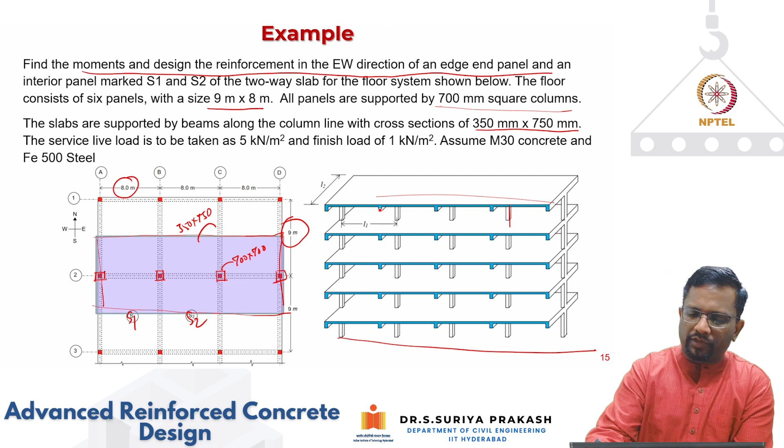Now for these two edge panels, S1 and S2, we have to find out the distribution of moments and calculate what reinforcement is required. So if you look at it in cut elevation - section elevation - this is how it's going to look. You have columns that are all part, and the slab that is all part. In addition, these transverse beams are also part of the frame, so all of them are going to act. Now we are going to look at one such panel and design for that.

Now, before applying the provisions in direct design method, we need to check the limitations of direct design method. The first condition is there should be 3 continuous spans in each direction. So in this case, if you look at it, these are all 700 by 700, right? And you see here, so what would be Ln?

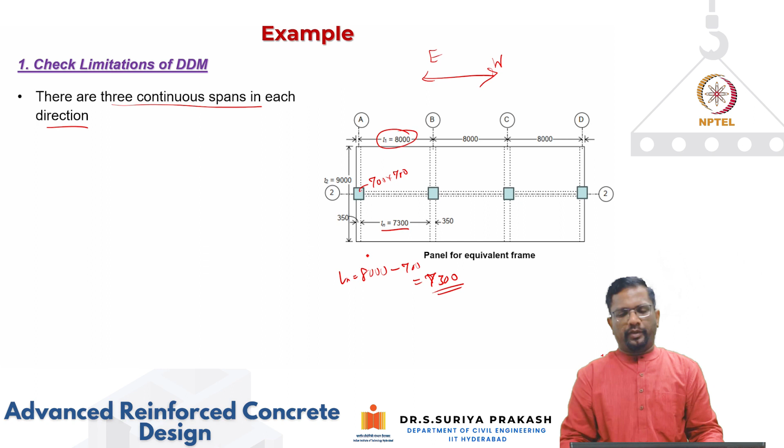Ln will be 8000 because now we are looking at the east-west direction - that is the direction we are designing. So Ln is going to be 8000 minus 700, which is going to be 7300. That is basically your Ln, clear span - Ln is the clear span between the column faces.

Now, what would be the transverse width of this particular frame? You see from the column strip, you go to the edge of the middle next to this. So L2 is going to be 9 meter, because that's your column spacing in the transverse direction, which is L2, which is 9 meters.

Anyway, with respect to limitations, we have seen that you have span number 1, 2, and 3, so the first condition is satisfied - 3 continuous spans in each direction.

Next, the panels are rectangular with long span to short span 9 by 8, which is 1.125, less than 2, so you don't have to get into the condition of one-way slab. The panels are rectangular with ratios less than 2. And there are no offsets - here it's a nice case where all the columns are in a straight line, so there are no offsets.

So we don't violate the limitations. The successive span length should not differ by more than 33%. You see here, each span is now 8 meter long, so there is no difference in span length - that is also satisfied.

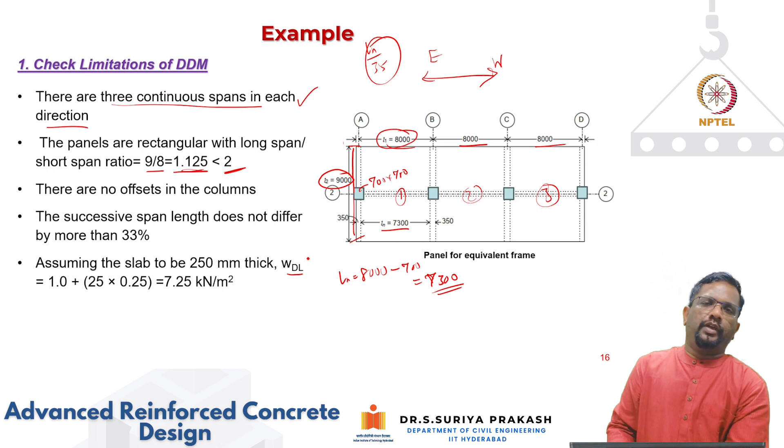Now let me assume a slab thickness of 250. You can ask how I assumed this 250 - we will tell you how to do that. As a thumb rule, if you quickly want to do it, you can use L by 35 to start with - span to depth ratio equal to 35 to find your effective depth. But let me assume 250, and I'm assuming a superimposed load of 1 kilonewton per meter square. When you do that, you get a load of 7.25 kilonewton per meter square for dead load - this one is for superimposed dead load.

Now, live load to dead load ratio: live load is given as 5 kilonewton per meter square. So 5 by 7.25 is less than 3, so I don't need to really consider pattern loading. Anyway, direct design method does not consider pattern loading. Pattern loading becomes important when your live load to dead load ratio becomes more than 2 or 2.53. In this case it should be less than 3, and we are only at 0.69, so the ratio is very well within the limit.

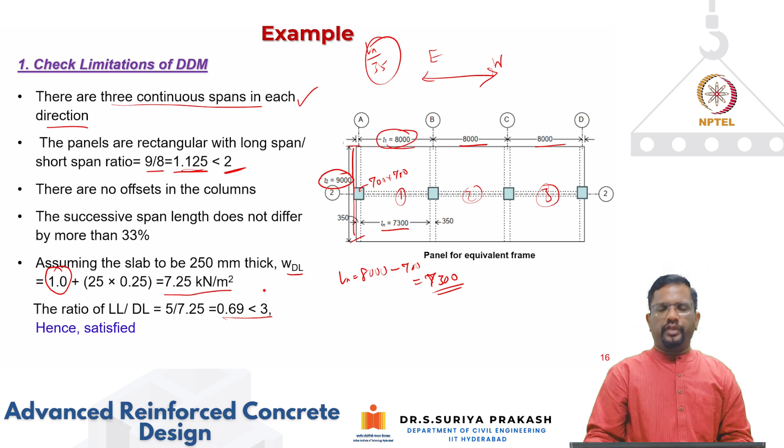Now let's look at the next step, which is to calculate the relative stiffnesses of the beams. The relative stiffnesses of the beams have to be between 0.2 and 5. Now if you look at it, this relative stiffness equation is alpha b1 into L2 square by alpha b2 times L1 square.

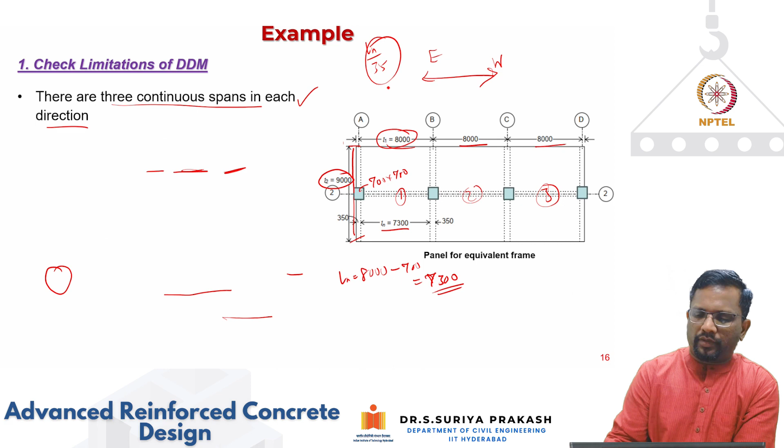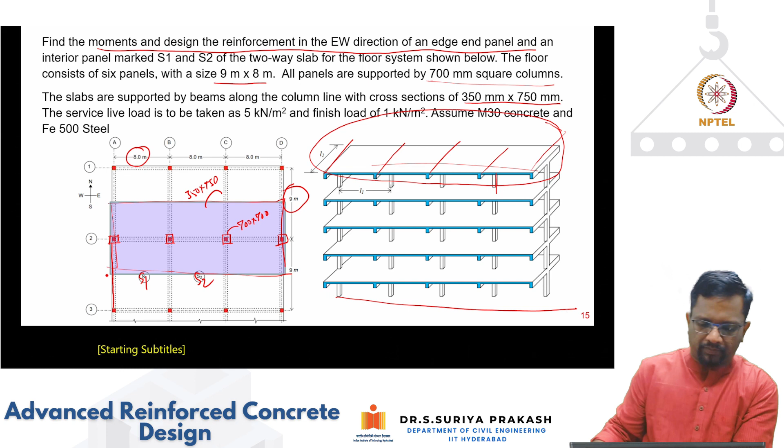Now what is alpha b1 and alpha b2? We have seen alpha b is IB by IS. If you go back, let's say, for this particular panel, consider this is your beam and this is your beam, like this for one panel. So you consider your stiffnesses in two orthogonal directions. That's what we're going to look at, how to do that.

So if you look at the slab in one direction, the width is going to be L2, and thickness is ds. So width is L2, and you know moment of inertia for a rectangular section is BH cube by 12, and H here is the thickness or depth of the slab, which is ds. So it works out to L2 into ds cube by 12.

Similarly, what is the span moment of inertia of slab in the other direction? Now in the other direction, the width is going to be L1. Again depth remains the same, so it works out to L1 into ds cube by 12. And alpha b is IB by IS, so alpha b1 by alpha b2 becomes IS2 by IS1, which when you divide them, ds cancels, 12 cancels, and it works out that IS2 by IS1 is nothing but L1 by L2.

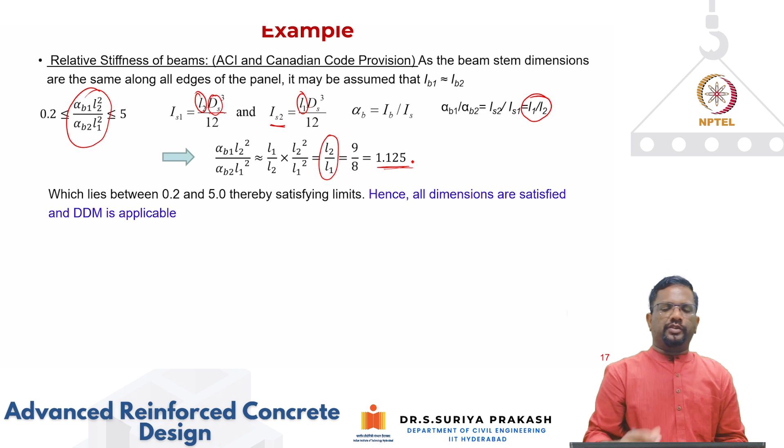Now when you substitute that here, you will find that this ratio will work out to L2 by L1, which works out to be 1.125, which is between 0.2 and 5. So you are satisfying the relative stiffness requirements. Hence all the dimensions are satisfied, and we can use the direct design method for doing the calculations.

Now let us see what is the first step. Next step in the two-way slab design: in any slab design, the thickness of the slab is always governed by serviceability criteria, particularly deflection criteria. So in this case, to calculate the thickness, we are considering the critical panel to be exterior panel S1.

So we are using the ACI Canadian code provision, which gives that the thickness has to be greater than ln times 0.6 plus Fy by 1000, divided by 30 plus 4 into beta times alpha b. Now what is beta? Beta is longer span to shorter span ratio. In this case it's the longer clear span to shorter clear span, 8.3 by 7.3, which is 1.14. And Fy, we are taking 500 grade steel, so we take 500.

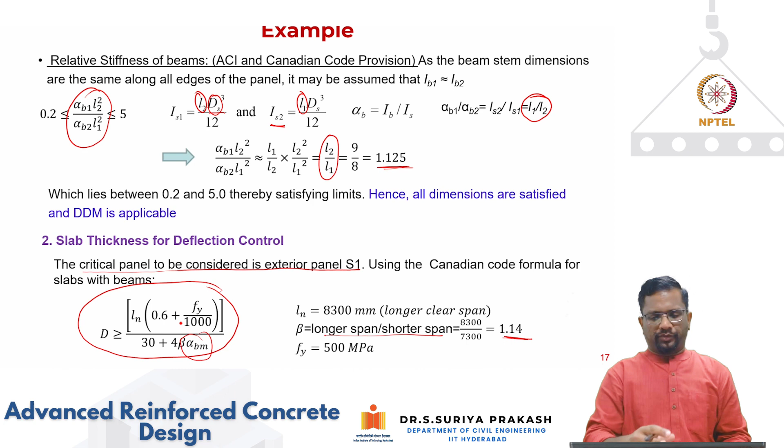Now what is alpha BM? Alpha BM is the average relative stiffness parameter of the supporting beams to slab ratio. So let's calculate now what is alpha BM.

Now in cast-in-place construction, the slabs and beams are all cast together, so we have seen in flexure also that a part of the slab will act as a flange for the beam. Now if you're looking at an interior beam, take this clear dimension as dw. Then how much should be the width of the flange, or the portion of the slab I consider as part of the beam? If this is BW, I extend this by 45 degrees, by DW, and on this side by another DW. So the total dimension at the top that I can consider as flange is BW plus 2 times DW, the depth of your web portion.

So this should be less than BW plus 8 times the depth of your flange or depth of your slab. You have to satisfy this requirement. Similarly for an L section, it should be BW plus DW, and that should also be less than BW plus 4 times the depth of your slab.

So depending upon whether your beam is an interior beam or an edge beam, I can consider that as a T beam or an L beam, right?

So when you have a flat slab, depending upon what you have, beam width not less than column width - in that case you will have only this portion, whatever is within this column, considered as the beam portion. This is applicable when beam width is not less than column width. Or when the beam width is less than the column width, then what do you do?

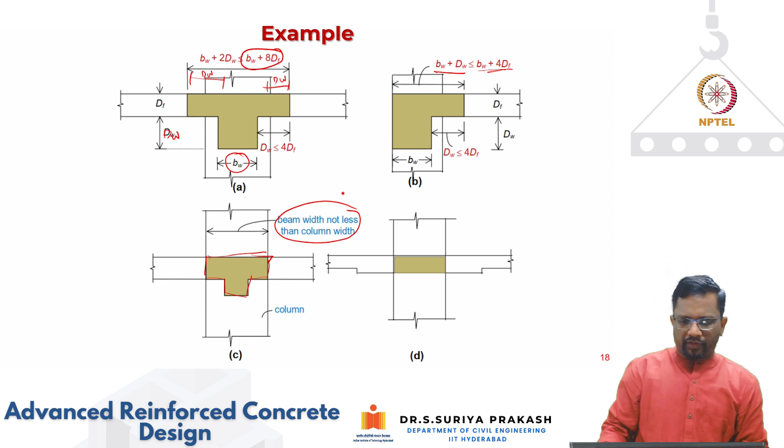Okay, so let's look at this. When you have a T section like this, from basic geometry calculations you can find out the centroid, let's say from the bottom axis, as coming out to be this - basically centroid calculation, so YC is this. Then when you calculate moment of inertia about this centroidal axis, you work out this simple formula using your parallel axis theorem, which you've studied in your basic mechanics of materials course, so I don't want to get into that. You calculate depending upon the geometry, where the centroid of the section is, what is the moment of inertia about the centroidal axis, all those things.

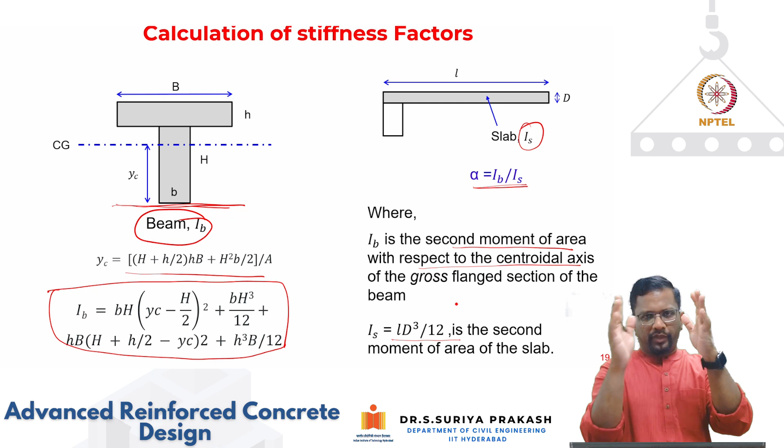For the slab, IS is going to be whatever the width of the slab in the transverse direction, and depth is going to be d. So it is L into d cube by 12, which will be the moment of inertia of your slab. Once you get your IB and your IS, alpha is nothing but the ratio of IB to IS. IB is the second moment of area with respect to the centroidal axis, and IS is LD cube by 12, the second moment of area of the slab. You can also do the same thing for an edge beam, which will be L shaped.

Now let's look at this exterior panel S1. Why are we doing this? I need this to calculate the thickness requirement to satisfy the deflection criterion. To calculate thickness requirement, I need to find the alpha BM parameter, which is the relative stiffness of all the beams supporting this panel. For example, I need to calculate alpha for this, alpha for this, alpha for this, alpha for this.

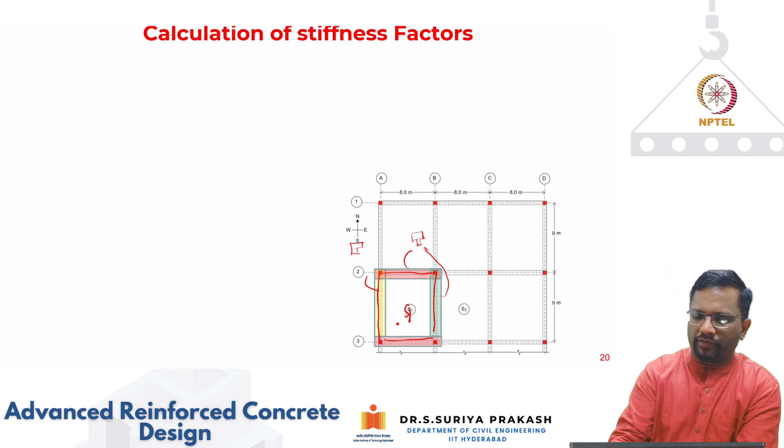Now this beam will look like a T section, right? Now this beam will look like an L section, right? Similarly, this and this will look like this. Similarly this also - so only this edge beam will look like an L section. Depending upon the geometry that we have, alpha B parameters have to be calculated.

Now what is A? A is for this - let me erase this. So this is the first case, A, and these are the dimensions. Then you calculate your moment of inertia of the beam, moment of inertia of the slab, and then you get your alpha parameter as 3.39. Similarly, we go ahead and do this for case B.

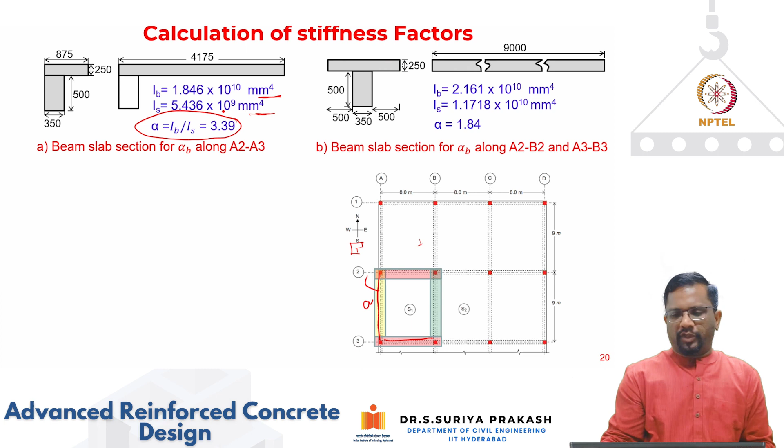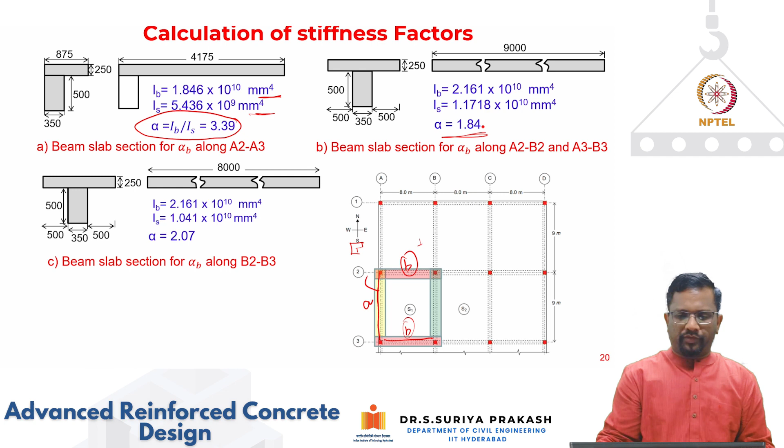Next is case B - A2, B2, and A3, B3. This is also the same, so this is also case B. So for this also, alpha works out to be 1.8. Similarly I do it for this location which is C, and alpha works out to be 2.07.

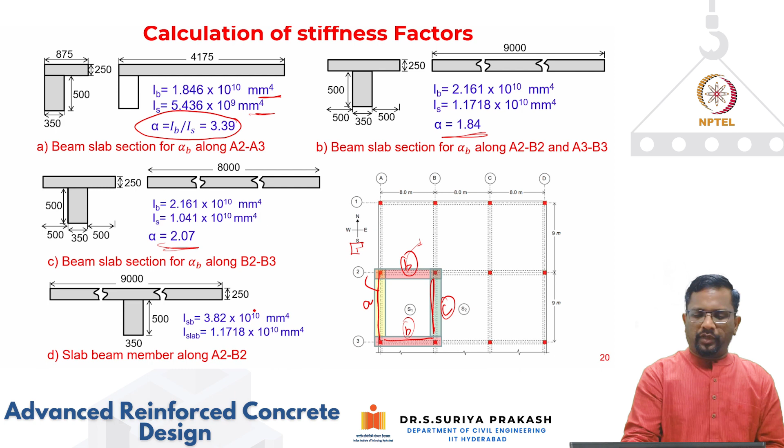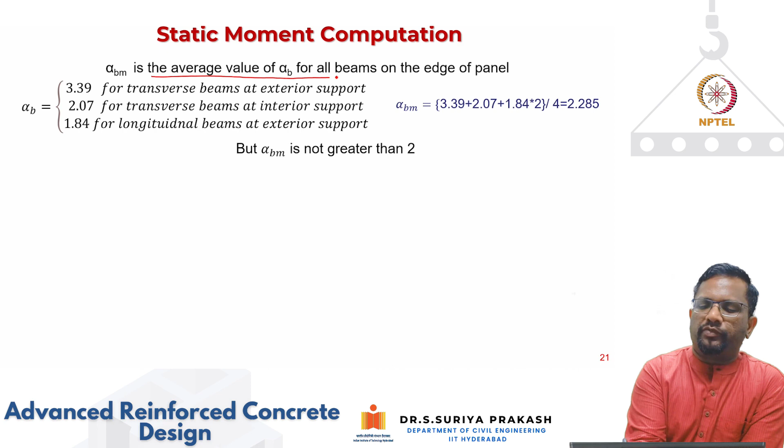Now I need to calculate, similarly for the slab beam member along A2 and B2, and you will find it is going to be this - you get ISB as 3.8 into 10 to the power 10, and I slab is this. If you substitute that, you get your average. What is alpha beam? Alpha beam is the average value of alpha B for all the beams on the edge of the panel. We calculated alpha B of 3.39 for transverse beams at exterior support, 2.07 for transverse beams at interior support, 1.84 for longitudinal beams at exterior support. So you take the average of all those things, and you work out to be 2.285.

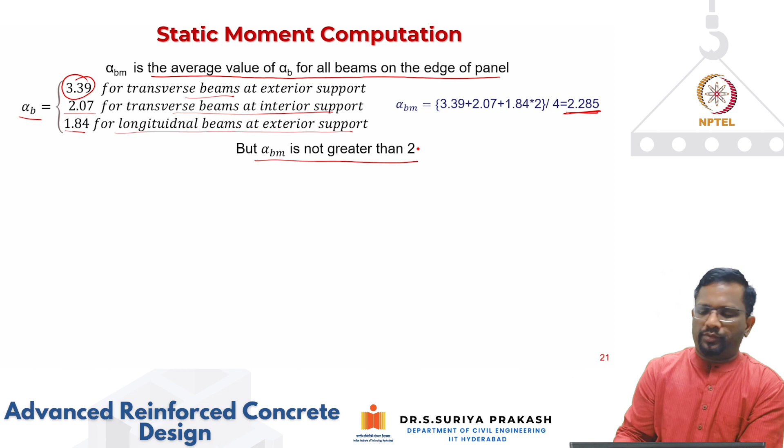If you substitute that, you get the thickness or depth of the slab should be at least 233.4 mm. Then only the deflection criteria will automatically be satisfied. Otherwise, you have to explicitly do the calculations, and deflection calculations for a two-way slab are quite involved, so it's relatively difficult. Rather, we can do finite element analysis to find out.

So if you use this, you don't need to explicitly check. So the slab thickness - when you put 15 mm clear cover, and assume we are using an 8 mm or 10 mm bar, then 250 mm will be adequate.

Now also we can see that when alpha b times L2 by L1 is greater than 1 for all the beams, they are adequately stiff. So in fact we don't really need to use the direct design method for this particular example. We could have actually used the moment coefficient method given in IS 456. That also would have been more conservative - in fact those coefficient values are higher and will be more conservative than what is given in the direct design method.

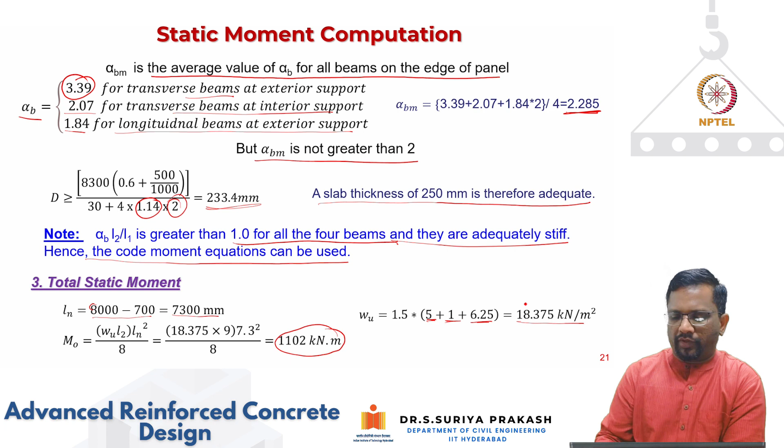And how do you get your W? Again, 5 is your live load, and 1 is your superimposed load, and this is the thickness of the slab. So when you add all of them and multiply by 1.5, you get a factored uniformly distributed load of 18.375. So when you substitute that, this is what your total static moment is.

Now let us look at the longitudinal distribution moments. It's relatively very easy - we are just going to follow this coefficient, that's all. At exterior span, exterior support, this is the value. At exterior span, mid span, this is the value. At exterior span, interior support, this is the value. So like that, you just follow the coefficients and find out the distribution.

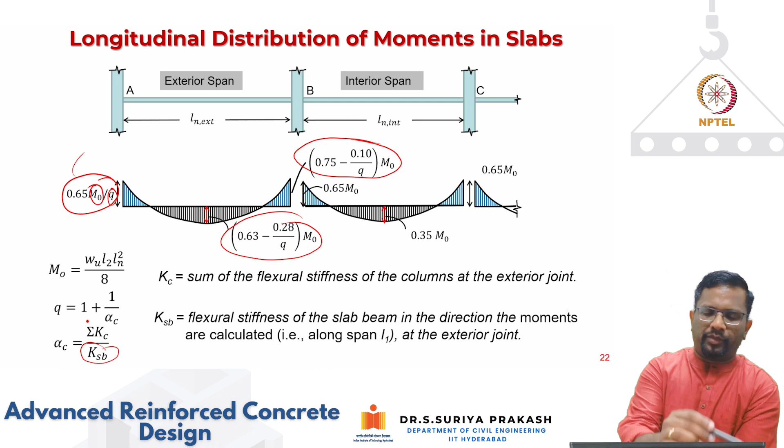So for example, M0 we have already calculated. To use this, now I need to find out what is Q. Q is 1 plus 1 by alpha C, where alpha C is the summation of stiffness of all the columns connecting at the exterior joint divided by the flexural stiffness of the slab beam. This is the slab beam element we calculated in the previous case. So you plug in these values and get your Q value, and then you can calculate alpha C. Let's see now, longitudinal.

For an interior panel, it is very straightforward: 0.65 times M0 - 65% of the M0 goes as the support moment, and 35% of this goes as the positive moment. So it's very straightforward. Now for the exterior panel, let's look at it.

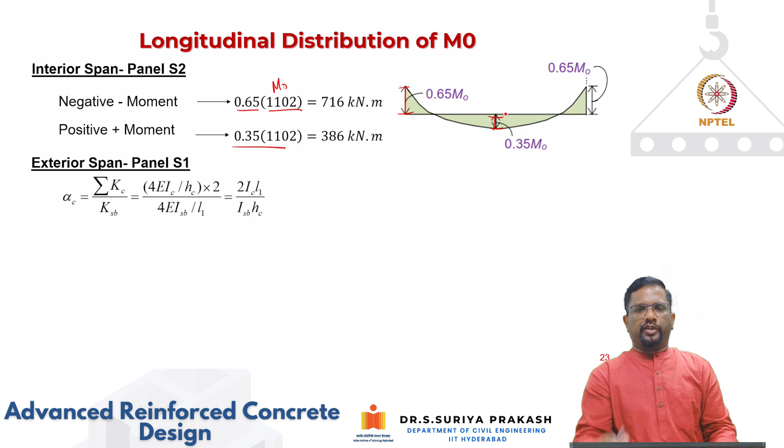Exterior span - now I need to find out what is Q. Q is 1 plus 1 by alpha C, right? So sigma Kc accounts for the column above and column below. Now what is the stiffness of the column? 4EI by HC, where HC is the height of the column. And you have one below and one above, so that's why I'm multiplying by 2. Now what is the stiffness of the slab beam that is connecting? 4E ISB by L1.

L1 is the span, right? So when you simplify that, alpha C works out to be 2 into IC into L1 by ISB by HC. And if you substitute your values, then you get your alpha C as 2.39, and Q will be 1 plus 1 by alpha C. So we substitute Q is 1.4.

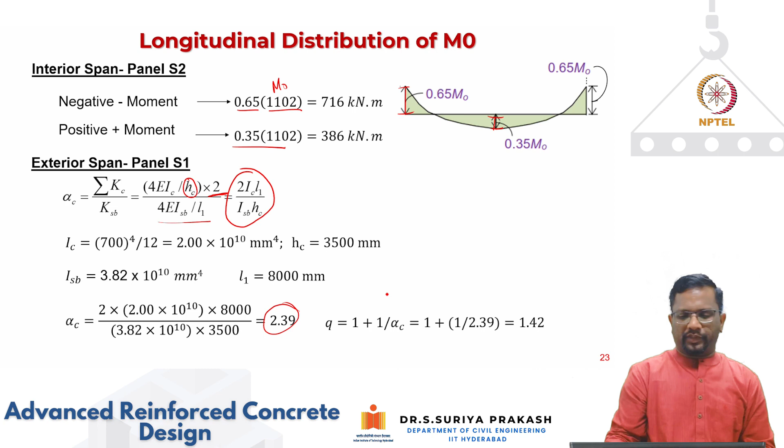Now that I got the Q, what is the distribution for your exterior moment? 0.65 M0 by Q, that works out to be 0.457. 0.457 times M0, which is 1102, gives 504 kilonewton meter. So that is what I have written, 504 kilonewton meter, right?

Now, what is the negative moment at interior support? It is going to be 0.75 minus 0.10 by Q times M. If you substitute for the Q we previously calculated, that works out to be 0.679. Then that value is 749. So that is what we have written here, right?

Now, what is the positive moment at the interior support? Or sorry, this should be, what is the positive moment at exterior span? Okay, so 0.63 minus 0.28 by Q times M0. So that works out to be 477 kilonewton. That's what we are getting.

So all these values are for exterior span. Interior span we have already got 0.65 M0 and 0.35 M0. This is 716 and 386. For rest of the things anyway, they will remain same.

Now, you can also see that pattern loading we need not consider because live load to dead load ratio is less than 3. So the second step is over, that is calculation of your longitudinal distribution of moment.

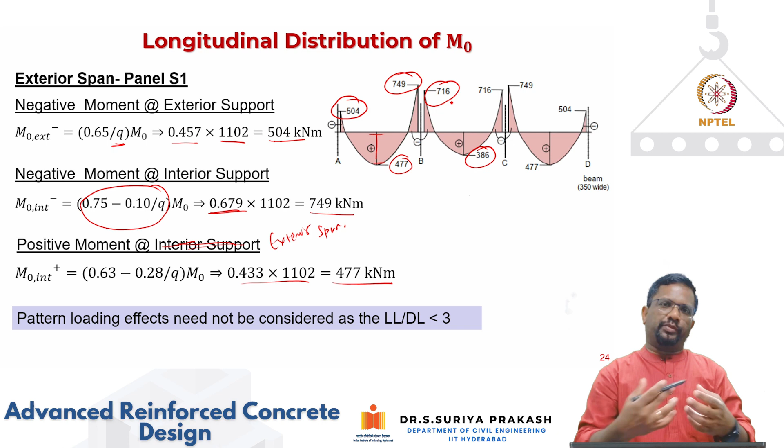Now, it is a two-way action. We have seen column strip should take majority of all these moments, and middle strip should take only a portion of that. Because column strip is a stiffer region, and a stiffer region should attract all this moment, right? So that's what the next step is, the transverse distribution of moment.

So at each critical section, now the part of the design moment will be assigned to the beam and balanced to the slab portion. And in this case, because it's a two-way action, again, we have to make sure that the beams are also going to take some portion of the moment.

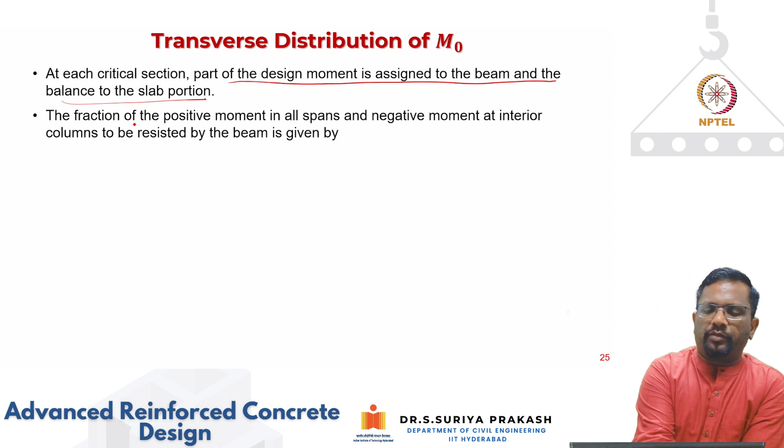So the fraction of the positive moment in all the spans and negative moment at the interior columns to be resisted by the beam is given by this parameter: how much should go to the beam and how much should be retained by the slab. That is this parameter, alpha b1 by 1 plus L2 by L1 the whole square.

So if you substitute it, it works out to be 0.44. And now alpha b1 cannot be greater than 1. So alpha b1 here, if you look at it, it works out to be 1.81. So hence the moment share, in this case, it is 0.44. The moment share of the slab is only 56%.

That means of all the longitudinal distribution moments, slab is going to take 56%. Remaining has to be given to the beams. How much? It is 44% to beams, and remaining 56% should be given to slabs, because it's two-way bending. Slabs are also deformed, the beams are also deformed, right? So that is also going to take some.

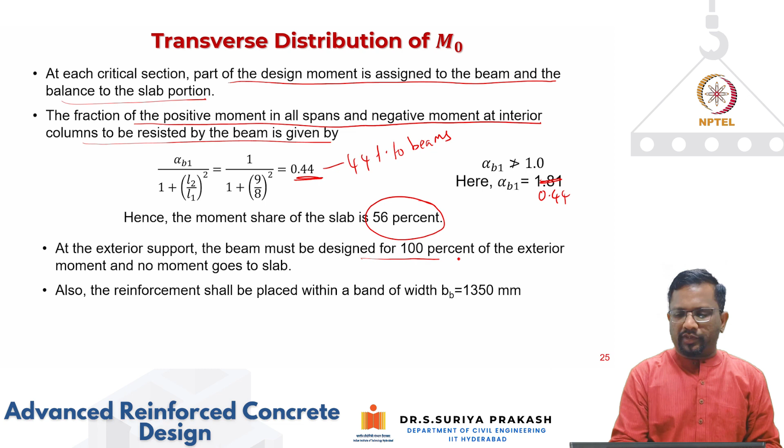At exterior support, the beam must be designed for 100% of the exterior moment, and no moment should go to the slab. This is the procedure given by the direct design method. And also the reinforcement shall be placed within the band of width bb, which is equal to 1350 millimeter.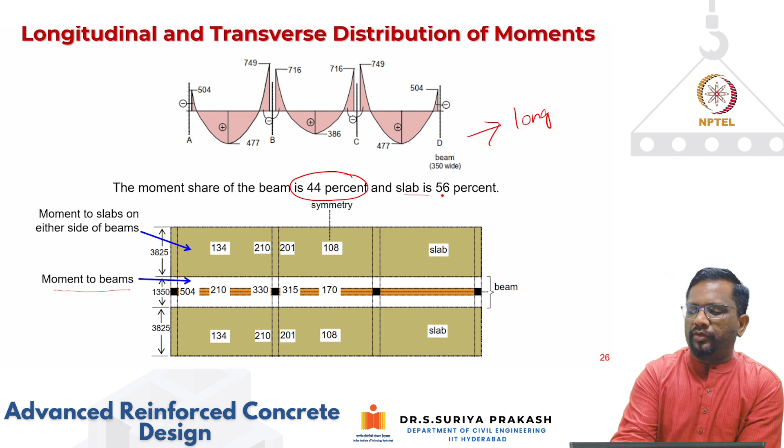44% and slabs are going to take 56%. So at every location, 504, only at the exterior moment location, all this 504 should be taken by only beams. But at all other locations, the moment share for the beam is only 44%, and for slab share it's 56%. So I multiply by 0.56 all those things, and then I distribute this to slabs on either side. So if you look at it, one value, 477 multiplied by 0.56, will give me 268. That 268, what I'm doing is putting it to the slabs on either side. Okay, so that is what we do.

Similarly, we do it for 386 also. 386 multiplied by 0.56 will give me 216. So this one side and that one side. So like that we distribute, because this beam is also part of this, that is going to take some moment.

How much moment do we give to the beams? That is what we have done based on the relative stiffness of the beams. So when you substitute all these things, now we got these moments that need to be designed for the slabs, so we can go ahead and check what is the panel moment demand that we're getting.

Now, effective depth of the slab, if I assume 20 mm cover and 10 mm bars, it works out to be 225 mm. Similarly, for beam, it works out to be 699.5 mm.

Then you can get your R value as Mu by BD square at different locations. Mu is negative 504, R is 2.94. For positive moment 210 kN/meter, R works out to be 1.23. Like that, different R values to calculate the flexural demand can be calculated for beams as well as for slabs.

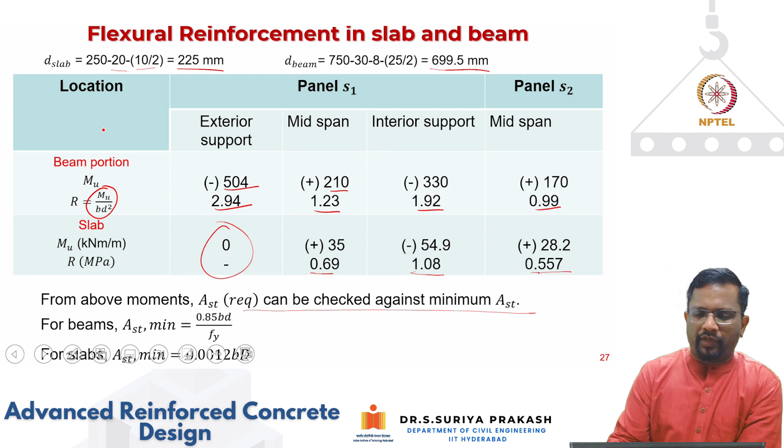The negative moment reinforcement in the beam at the top must be spread over a width of 350 plus 1.5 times ds, on either side. So that's how we end up with this location 1350.

How did we get this 1350? Basically, it should be spread over 350 plus 1.5 times ds. So if you substitute that on either beam rib, plus width of the slab, 1.5 times ds by 2, on either side. That is the reason we ended up with this 1350.

And there is no negative moment to the slab part of the exterior support. However, the slab at this part has to be provided with the minimum reinforcement that we said. At the exterior location, exterior span, the beam portion has to take all the moment. Slab will not take any moment. However, some minimum reinforcement has to be put.

So although Mu is 0, in order to take care of possible negative moments due to partial fixity, it would be appropriate to provide top reinforcement equal to 50% of what is provided at the midspan, extending 0.1 L. So these are detailing requirements.

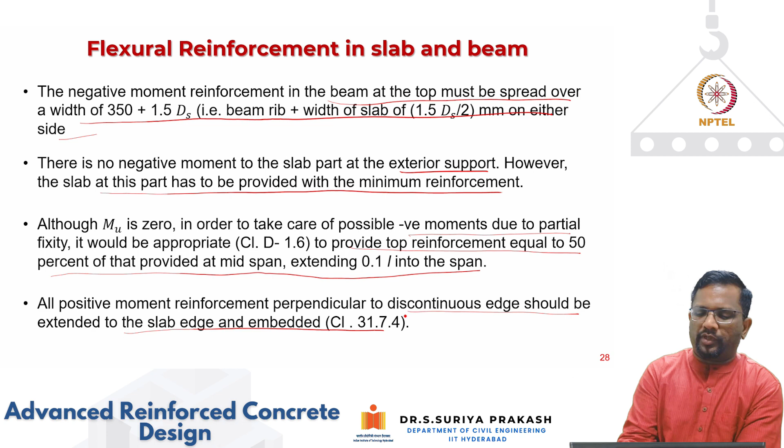So though slab is not required to take any moments, you don't need any reinforcement, but as a good practice, as a good detail, whatever positive moment reinforcement is coming, you take 50% and put it. And all the positive moment reinforcement perpendicular to the discontinuous edge should be extended to the slab edge and embedded as per clause 31.7.4. These are all some detailing requirements.

Now you can also see as the beams, torsional reinforcement also we have to check, especially the edge panels. Interior panel it will balance. In the edge panels and corner panels we have to check.

So in this case the supporting beams are adequately stiff, so torsional reinforcement has to be provided at the corners at discontinuous edges in panel S1, as in the case of wall supported slabs. And the requirement is 0.375 times AST plus. In the present example, it works out to be 125 mm square per meter.

Then you can put over a square size of 0.2 times 8, which is 1.6 meter. So this side 1.6 meter in the corner. This has to be provided only in discontinuous edges, that means the slab is not continuing on those sides. Only there the corner will lift up.

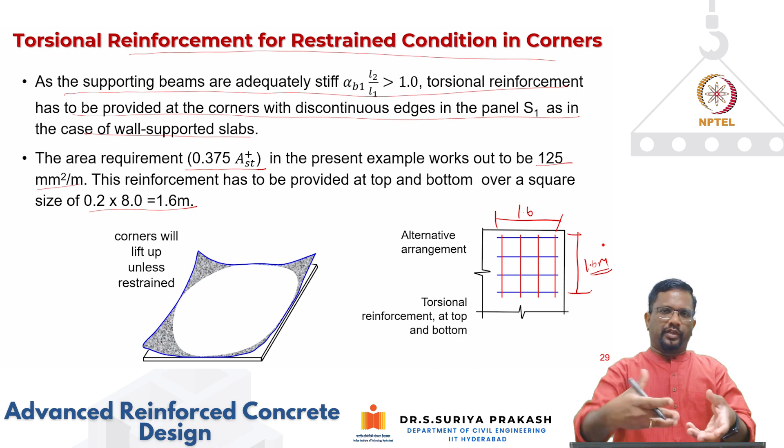But when it is continuous, it will balance, so there is not going to be any lift up. Also we have to see that the beams are provided along the column lines.

We also need to be careful about how we are transferring the moments to the column. Especially in flat slab, it will become very important. In this case, beams are provided along column lines, so transfer of unbalanced moment to supporting columns is not really critical. Usually the largest unbalanced moment occurs at the exterior support, and the beam is actually designed to resist this.

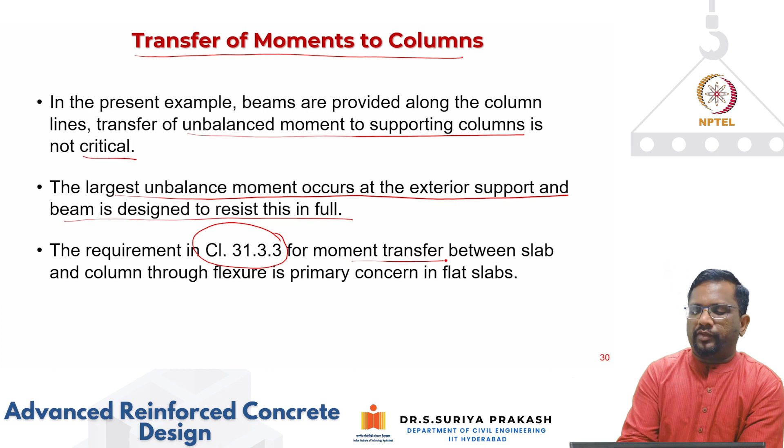As per the requirement of clause 31.3.3, the moment transfer between slab and column through flexure is a primary concern in flat slab, because in flat slab there is no beam. Everything is transferred directly from slab to column. If your span on either side of the column is quite different, then you will have an unbalanced moment.

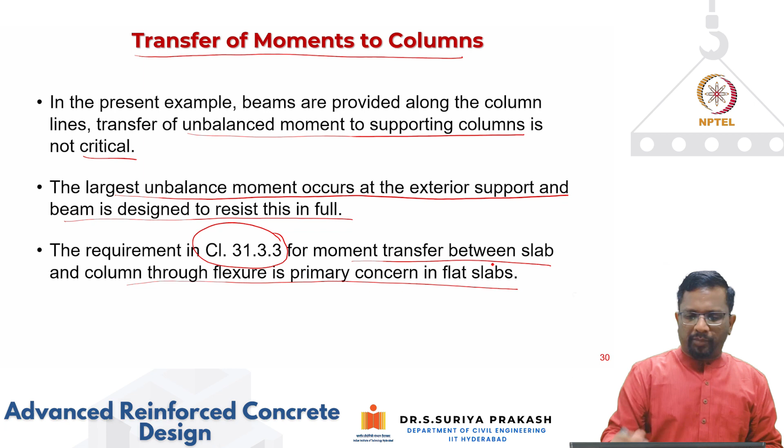That unbalanced moment, how much will transfer in bending and how much will transfer in shear, is determined by a parameter called gamma. Gamma times Mu, the demand at that location, will be the moment that needs to be transferred through flexure, and one minus gamma times Mu is the remaining portion transferred through shear.

This becomes especially important when you have a flat slab. Why does it come up? Because the moment on the left and right side of the column, or slab, is going to be different. Let's say this is M1 and this is M2. Now M2 is greater than M1, and the difference has to be somehow transferred. How much you can transfer in flexure and how much in shear works out from this gamma parameter.

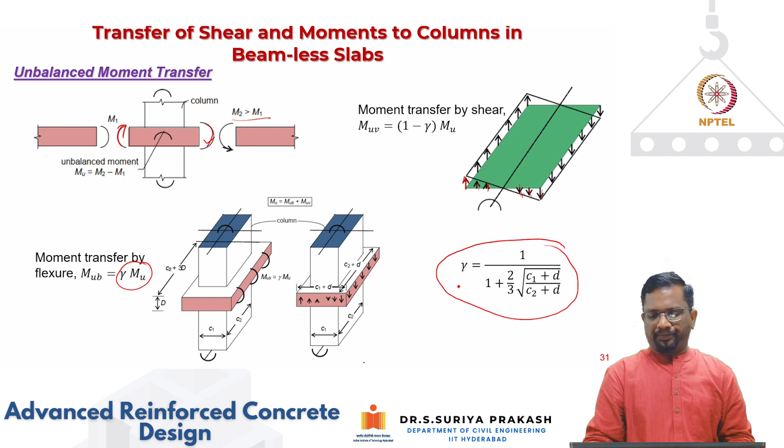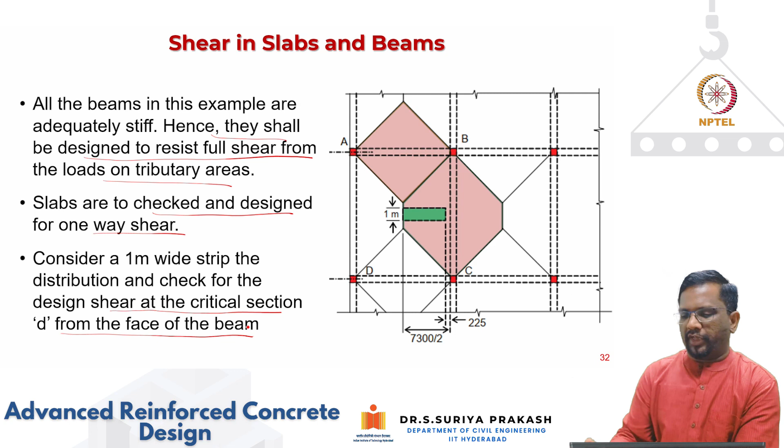Shear in slabs and beams also we need to take care of. All the beams in this example are adequately stiff, so they shall be designed to resist full shear from load coming from tributary areas, and slabs have to be checked and designed for one-way shear. We consider a 1 meter wide strip and check design shear at the critical section D from the face of the beam, as we do for typical one-way shear.

For this particular example, the shear demand is Wu times 0.5 ln minus D, where Wu is the factored load, ln is 7.3 and D is 0.225, which works out to a shear demand of 62.94 kilonewton. Then the nominal shear is the shear demand divided by breadth, which is 1 meter, divided by effective depth, which is 225 millimeter, giving 0.28 megapascal, which should be less than tau max for the particular grade of concrete, which is the case here.

For slab, the shear strength is K into tau C. For M30, the amount of steel provided is 0.279 percentage. For that, from the table, you get tau C of 0.385 megapascal, which is higher than the demand of 0.28 megapascal. So K into tau C is greater than tau V, so it's okay.

This is assuming a 10 mm bar at 125. All the beams in this example are adequately stiff, so the slab system may be adequately designed by the much simpler method of moment coefficients prescribed by code for wall-supported slabs. In this case, we may not have needed the direct design method, but just to illustrate the concept of direct design method, we have adopted this, because these beams are very stiff, we could have used the moment coefficient method.

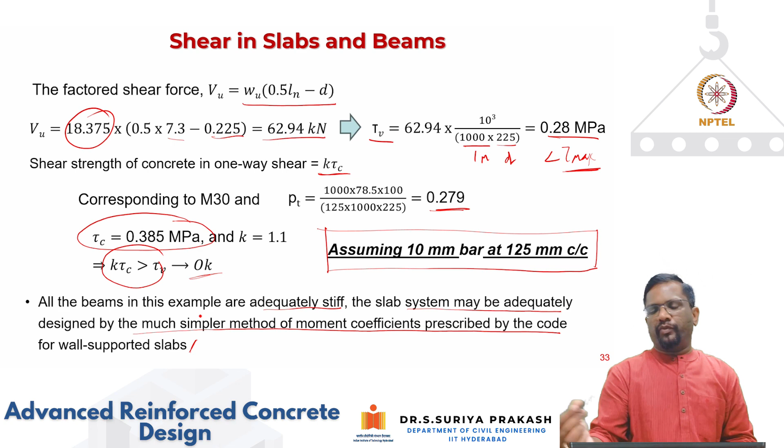So let's summarize what we have done. We've discussed the limitations of the code coefficient method for design of slabs, the procedure for the direct design method, and its limitations and applications. We also went through one example in detail, for a couple of edge panels, using this method to calculate the moment distribution. Once the moment distribution is found, calculating reinforcement is a straightforward process, basically section analysis.